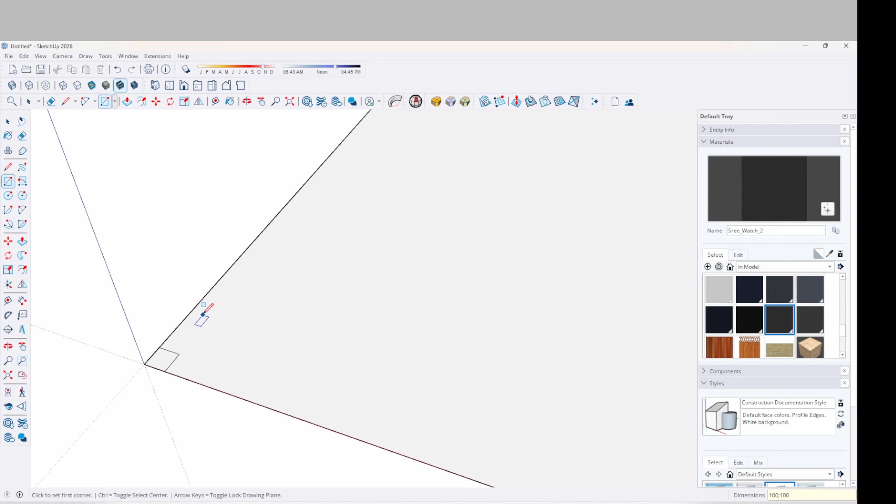Then in each corner I would start with a rectangle and draw the posts. Make them maybe 100 by 100 millimeters, and for the height, decide yourself. I can make it like 2 meters, 2,000 millimeters.

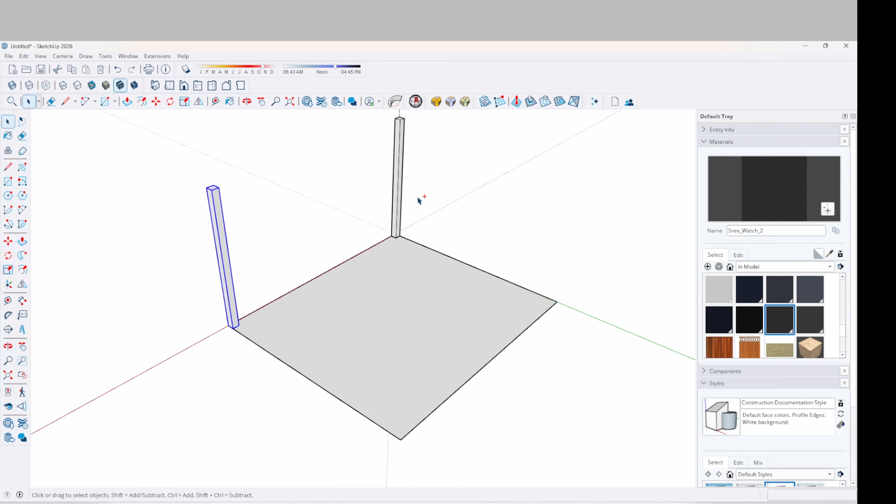Then I'm going to make this into a group, and copy it over to the other corners. So there's the first one. Hold down Control and select both of these, make a copy, Control again, and place them in the corner. Now I've got the basic shape. I can double click on this rectangle and delete it, we don't need it anymore.

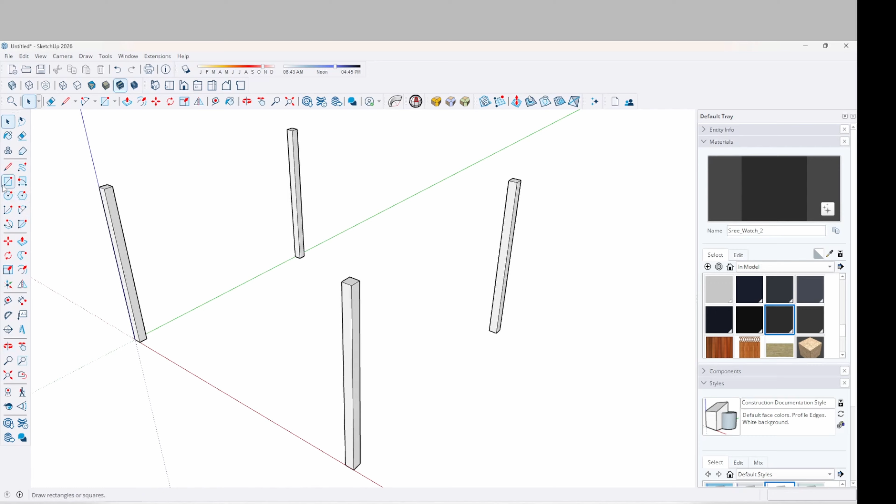The next thing I would do is the short pieces on the side. I'm going to make mine about 145 with the depth, so we'll place it around here - I can see it's 3 meters long like I made it. So we do 145 by 3,000, and then give it a push-pull of 45 millimeters.

Triple click and right click, make group, and then copy it over to the other short side. I'm going to use this as my base point, press Control to take a copy, and place it on the outside on the opposite side.

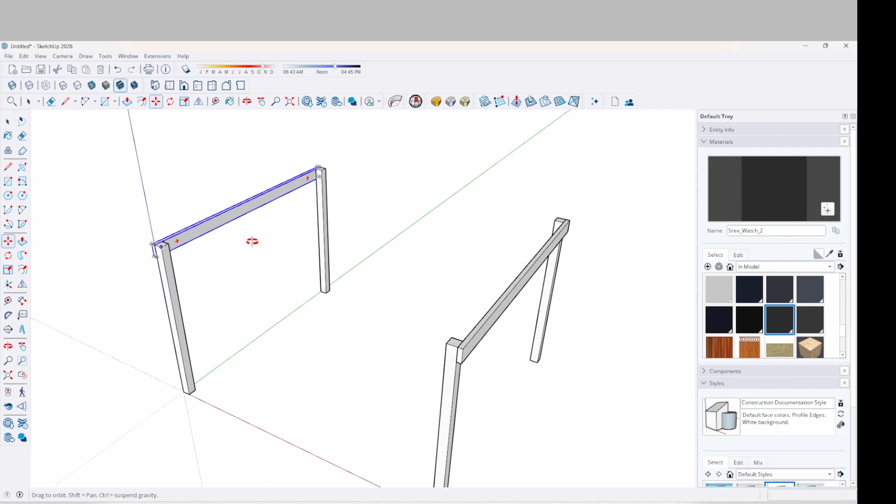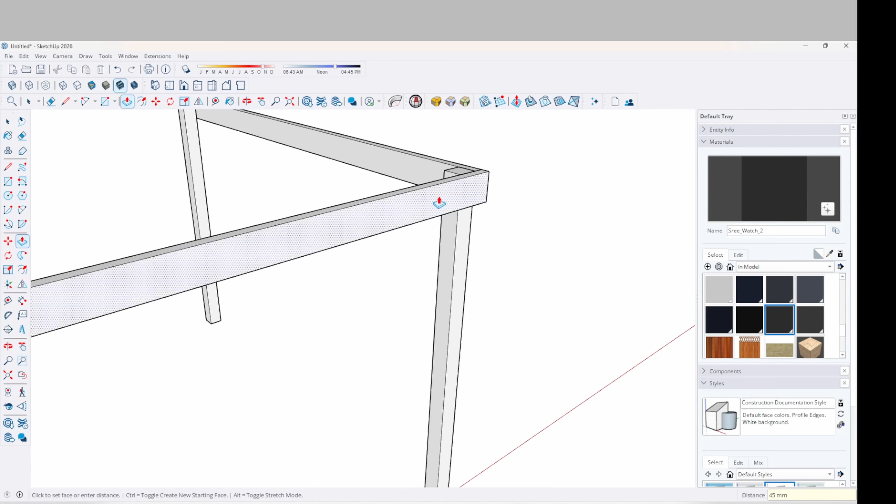So now we're going to make the long side - a rectangle again. Start furthest out on the left, and now we've got the size already, so it's just a click. The only thing we need to do is give it a thickness, again 45 millimeters. Triple click on this one, right click, make group, and then move.

I'm going to take a copy of it with Control, and place it on the opposite side. So there we get the basic shape.

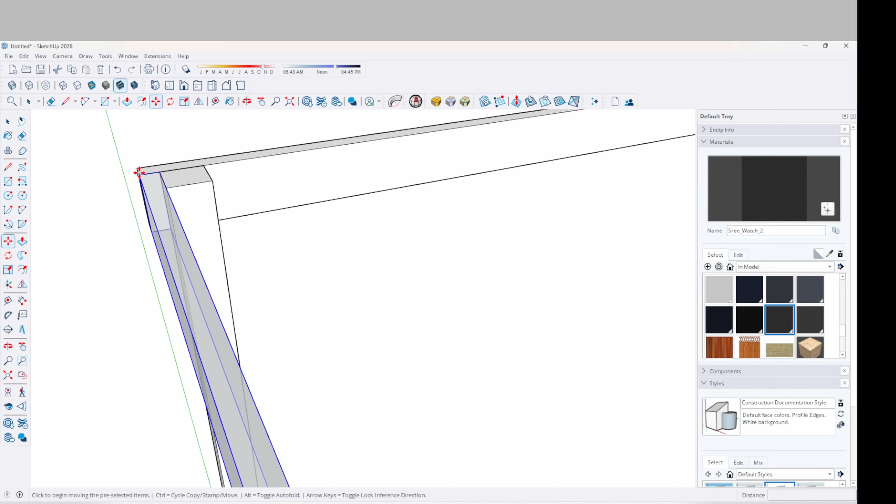Now if you want, you could take this one on the left, select the midpoint, press Control, and place this in the middle of everything until it finds a midpoint here - keep going, midpoint in group.

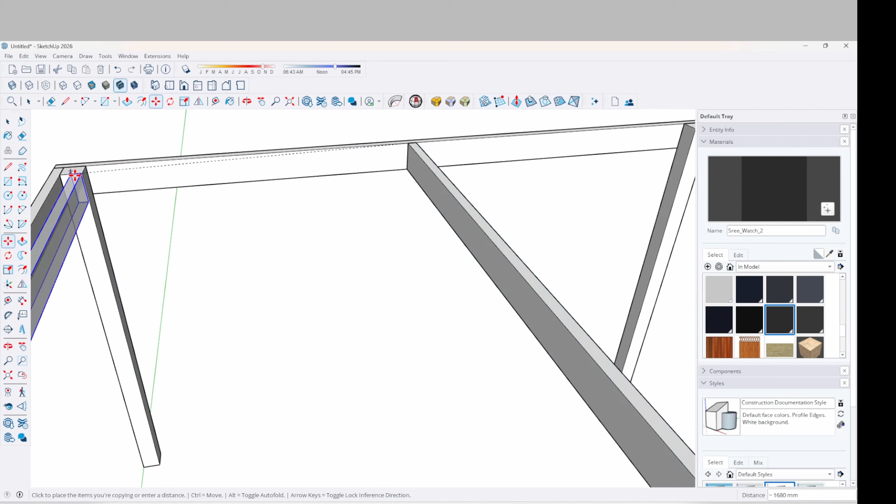And then, well, if I was going to build this - I'm not a joiner or anything, just a DIYer - this is where I would put this piece, for a bit of extra strength, and divide that by 3. Then the same on this side: take a copy of this one and place it on the post around that, also dividing it by 3 like this.

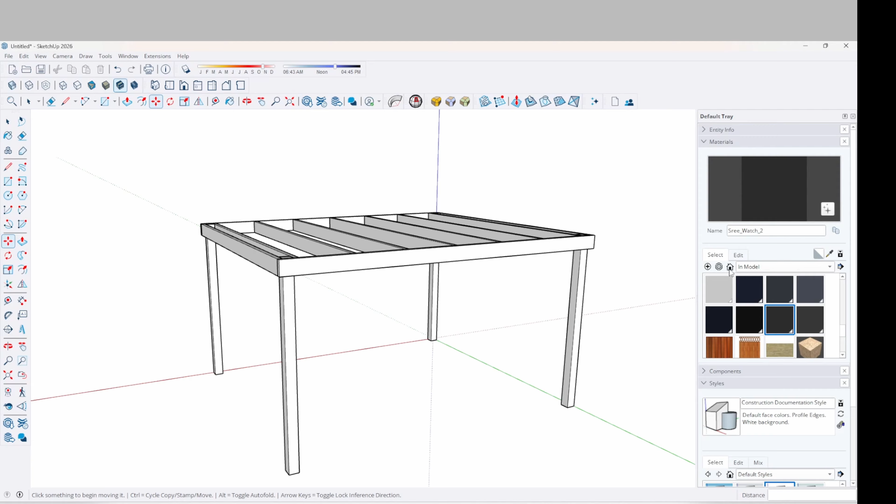And there you get a basic pergola. You can also add materials if you like - you could go to wood, maybe this one like an oak kind of material. If we just select everything at once, take the paint bucket and click on just one piece of wood, the material applies to everything.

So that's just your basic shape, basic pergola, or pergola.